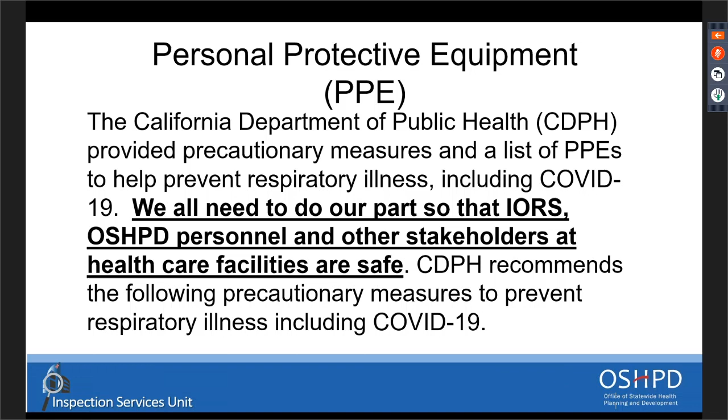Wash your hands with soap and water. Clean and disinfect frequently touched surfaces daily. If surfaces are dirty, clean them using detergent or soap and water prior to disinfection. Avoid touching your eyes, nose, or mouth with unwashed hands.

I think if anything, this is very, very important. All three bullet points here, just be cautious. And if you are in an area where you have to touch something, climb a ladder, or get on your hands and knees to get under some plumbing, don't touch your eyes, your nose, or your mouth before you wash your hands.

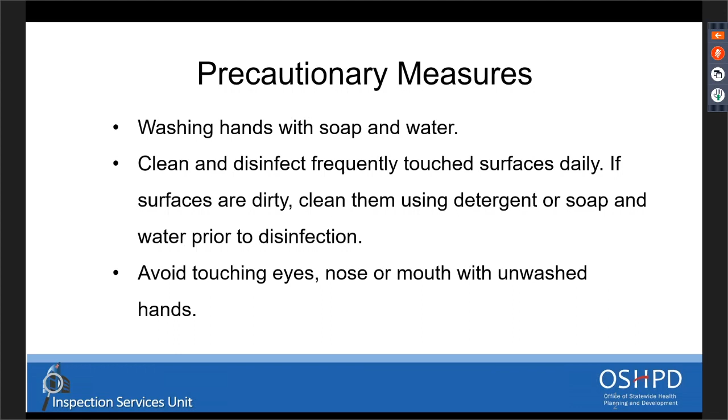Very, very important. Cover your cough or sneeze with a tissue or your elbow. Avoid close contact with people who are sick. Stay away from work, school, or other people if you become sick with symptoms like fever and cough.

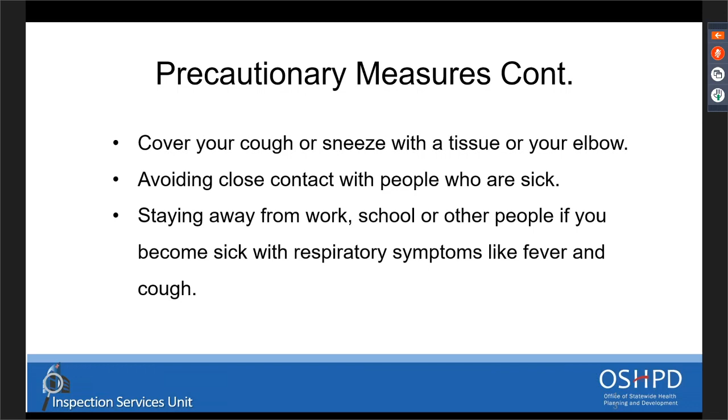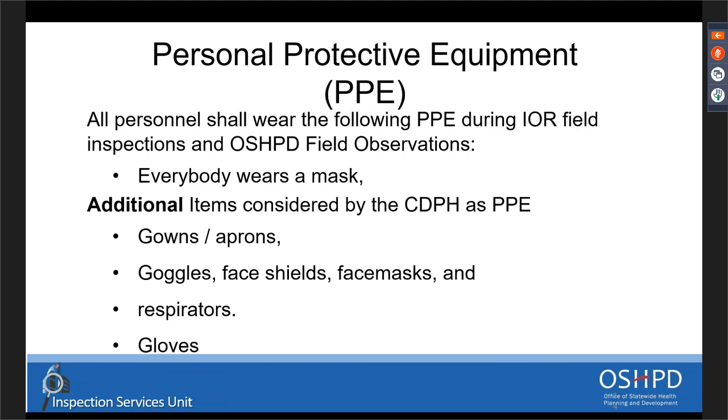PPE continued. All personnel shall wear a mask, is what we're telling people. Other additional items considered by the CDPH as optional are gowns, aprons, goggles, face shields, face masks, respirators, and gloves.

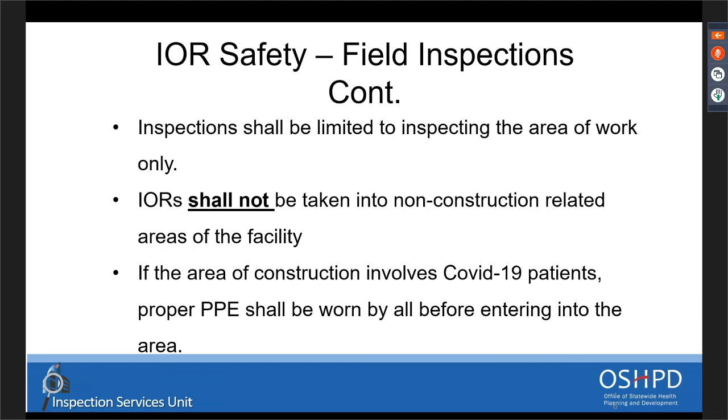Be sure to inspect only the areas of work. IOR should not be taken into construction areas that are not related to the work being done. And if the area of construction involves COVID-19 patients, proper PPE shall be worn by all before entering the area, so make sure that you protect yourselves.

If the area of inspection involves roof construction, the person responsible for guiding the IORs on the roof needs to identify all of the roof vents, where they are on the roof, and what area of the facility the vents are exhausting, like COVID-19 isolation rooms, ORs, ICUs, laundries, etc., making sure to steer the IORs and OSHPD staff away from those areas. You want to know where they are and how they're going to do that, so they need to provide you a roof plan of this information before you get on the roof.

That way, once you get on the roof, if you have a vent that's fairly close to the area you're inspecting, you need to be able to stay away from that area as well.

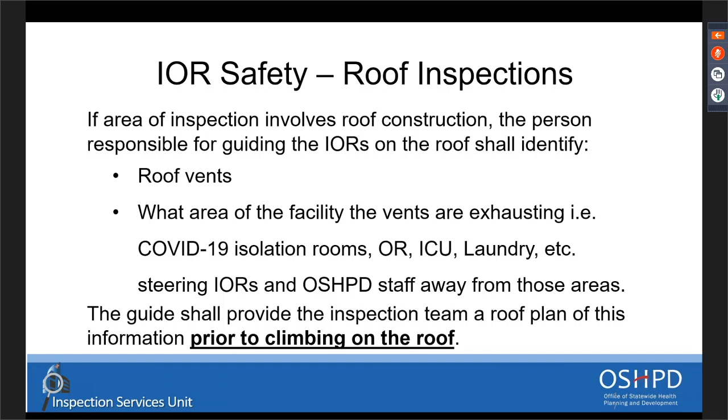A poll question: When guiding the inspection team through the facility, the guide shall be responsible for what? Avoiding non-construction related areas, avoiding all areas with COVID-19 patients, identifying all the roof vents exhausting COVID-19 areas, providing the inspection team a roof plan, or all of the above.

If you chose all of the above, you're right. All of these items are essential for your job as you're walking the job, and it doesn't have to be on the roof. If you're walking through an area where you may have to go through a room or an infected area, make sure you know that, and have that conversation with the construction manager or contractor as they guide you through the work.

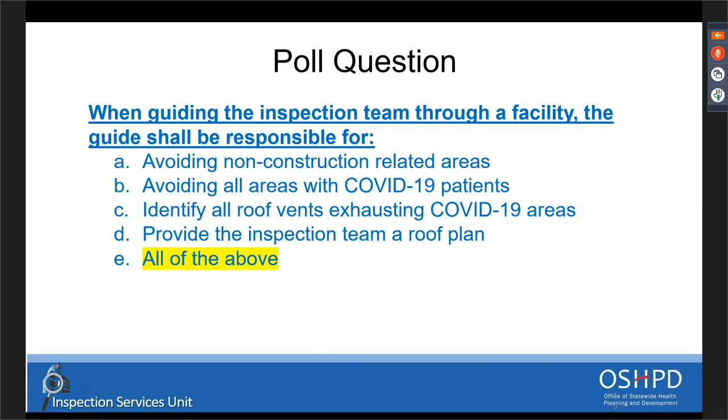So, what is a testing, inspection, and observation program, the TIO? This TIO program is crucial to OSHPD projects, and we're going to go over why in just a sec.

The TIO is a guide to assist the design professionals in the administration of construction projects under OSHPD's jurisdiction. It increases collaboration, accountability, and cooperation, provides assistance for the efficient development and implementation of code-required tests, clarifies the roles and responsibilities of the parties involved, and better defines the milestones in each project.

So this is a tool for the design professional to administer the actual project. Notice that we didn't say the TIO is administered by the IOR. If you've been part of our previous sessions, you'll know that the TIO program is not administered by the IOR—it's actually administered by the design professional, and that's a code requirement.

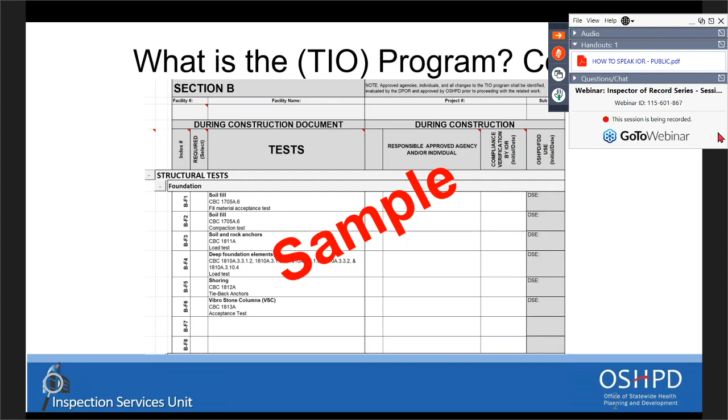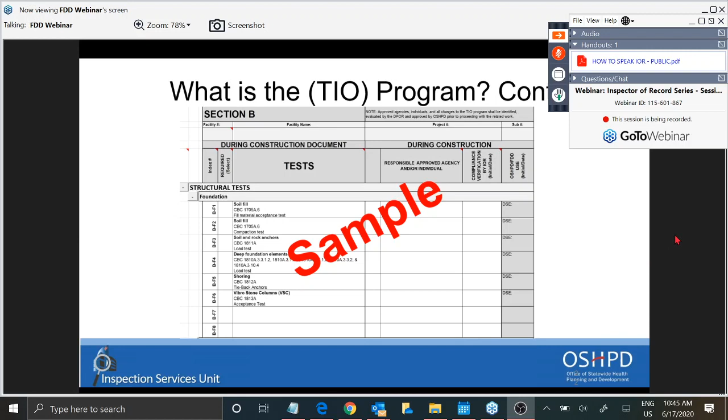On the right-hand side, in a vertical position, you'll see compliance verification by the IOR. That's where you as an IOR will come in and initial and date if you agree with their findings and if everything's okay per the required test. Then next to that box, you'll see OSHPD/FDD use, where we will go ahead and initial and date as well.

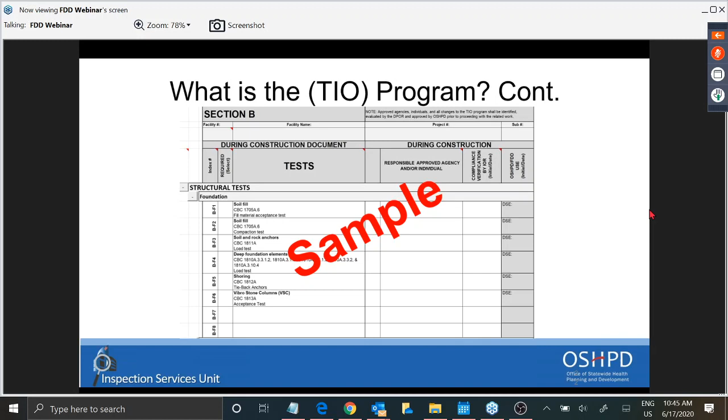What is a TIO program, continued? The TIO is a required element for OSHPD projects. Design professionals of record, or DPOR, must maintain all aspects of the TIO program current, since evolving projects—OSHPD projects—are rarely static.

So this is something you'll find the design professional will come in and have to identify the tests and samples required in the ever-changing construction project. If you've been part of any construction project, you'll find that rarely any project, regardless of size, is static—it's ever-changing. This leads into another area of the presentation where we emphasize that you, as an IOR, need to be active in the project. You need to be able to go out there and have conversations with the contractors and the people doing the installation about what's coming up and on the schedule.

So we'll get more into that in a little bit. OSHPD projects are dynamic and require team collaboration and regular reference to the TIO for milestones.

The format is the format we have on the website right now. It's an Excel format and it's downloadable. We have it both in Excel and PDF.

But know that this format we have on our website is just a sample, and it can be used by DPORs. But the DPOR can develop their own project and make it specific to their project. It may be that we didn't identify some of the tests required for that specific project, and again, the DPOR would have a better sense of that. So consult with your DPOR or the design professional as to what tests are going to be required and what samples are required as well.

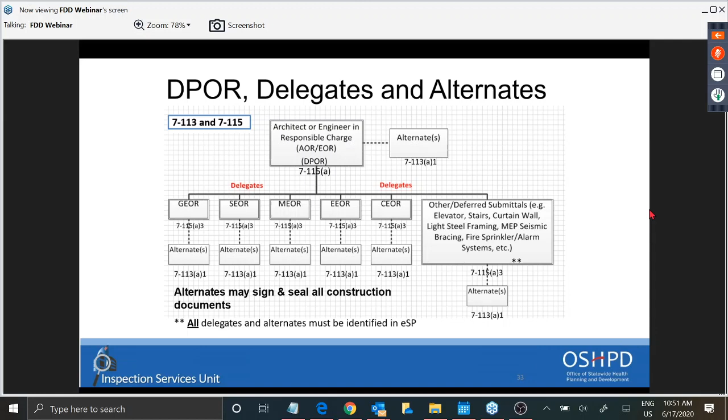The IOR is also responsible for gathering, maintaining, and validating related test and inspection documents such as credentials of special inspectors, and that's the code section that says you have to do that, collection of OSHPD test and special inspection forms, distribution of OSHPD staff field reports to contractor, owner, and DPOR.

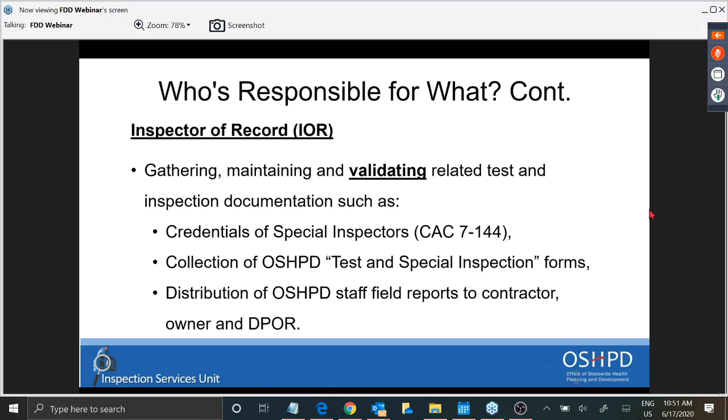You're also responsible for validating the work done by contractors, submitting VCRs to the DPOR as identified on the milestones on the TIO, keeping records relative to sign-offs, performing all IOR tests and inspections identified on the TIO as IOR responsibility.

The hospitals, per this section in the administrative code, California Administrative Code section 7-144, says the hospital shall provide for competent, adequate, and continuous inspection by one or more IORs.

When the hospital proposes more than one IOR, this is what needs to happen. On the TIO, a lead IOR needs to be identified to coordinate and communicate with the office. All other IORs also need to be approved by OSHPD prior to working on the project. On the TIO, the lead IOR will be identified, and all of the other IORs shall be identified as to what scope of the project they're going to be responsible for inspecting.

Poll question: who is responsible for the TIO? Is it the IOR, hospital owner, DPOR, or the contractor? And if you thought the DPOR, you're right. I think we stressed that a couple of times, so I'm hoping you got it.

IORs and inspections. So what's a competent inspection? It's reporting of all inconsistencies or seeming errors in the approved construction documents, preparing complete and accurate field reports for each day or portion of the day present at a job site, noting all construction deficiencies or deviations from the approved construction documents, making sure you note the date, time, and method of correction for the deficiencies, and notifying the contractor in writing of any deviations from the approved construction documents which have not been immediately corrected by the contractor. So this is key.

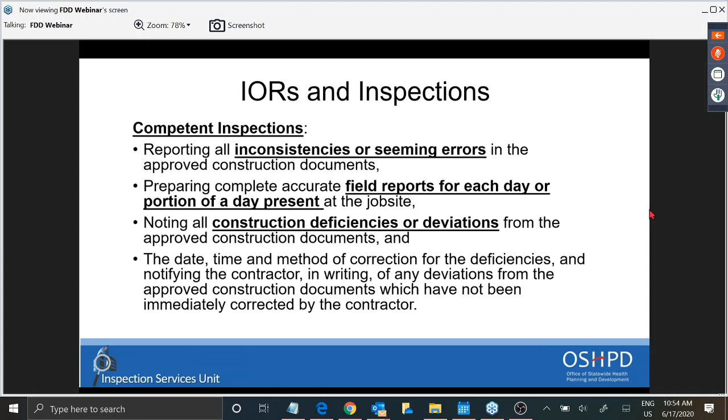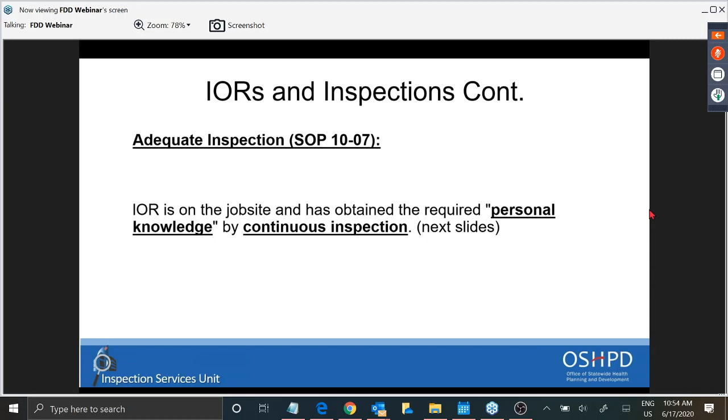Adequate inspection, what does that mean? SOP 10-07 is a document on our website, Standard Operating Procedures 10-07, and it clarifies what the adequate inspection is we're looking for. The IOR on the job site has to be on the job site and has obtained the required personal knowledge by continuous inspection. We'll go into continuous inspection on the next slides.

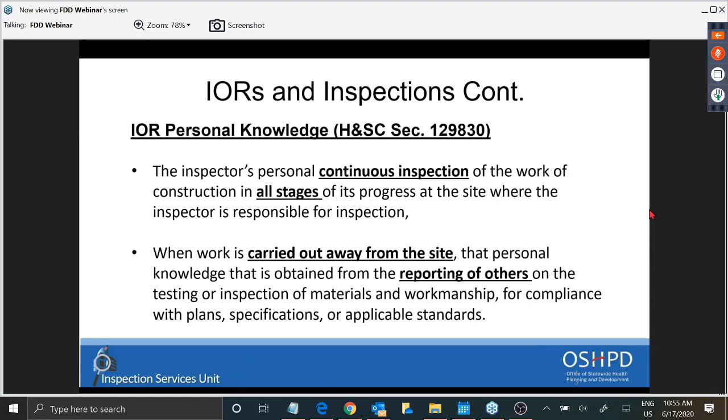IOR personal knowledge, H&SC means Health and Safety Code, section 129830. And this is what it says: the inspector's personal continuous inspection of the work of construction in all stages of its progress at the site where the inspector is responsible for inspection. It also means that when work is carried out away from the site, that personal knowledge is obtained from reporting of others on the testing of or inspection of materials and workmanship for compliance with plans, specifications, or applicable standards.

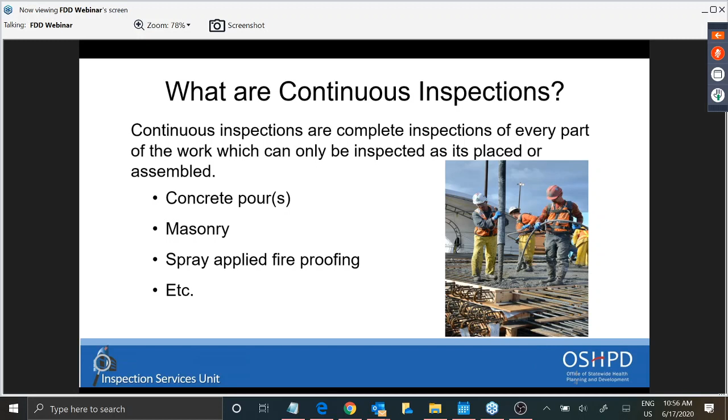An example of continuous inspections could be something like concrete pours, masonry, spray applied fireproofing, etc. Continuous inspection is inspection of the work that cannot be inspected after it's placed. So if you're needing to look at the placement of the concrete and the specs call for a concrete vibrator needing to be used, you need to be sure that it's there, being used, and it's the right size. If it's too big, it might blow out the framing for it, etc. So your presence and your inspection is needed continuously during these types of applications.

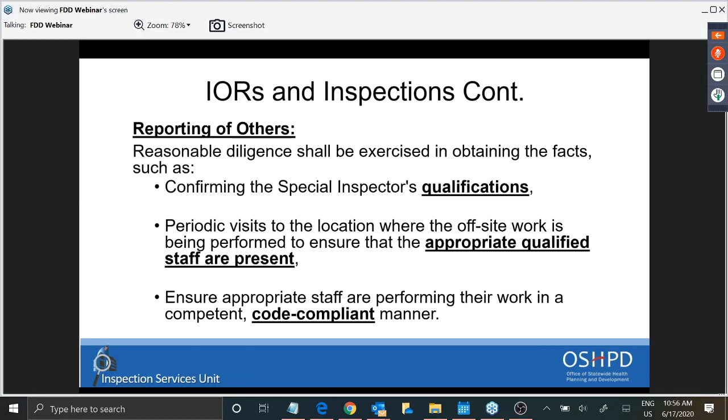IORs and inspections continued. The reporting of others - reasonable diligence shall be exercised in obtaining the facts, such as confirming the special inspector's qualifications, and we'll get more into that in the next slides. Periodic visits to the location where the off-site work is being performed to ensure that the appropriate qualified staff are present and performing their work in a competent, code-compliant manner.

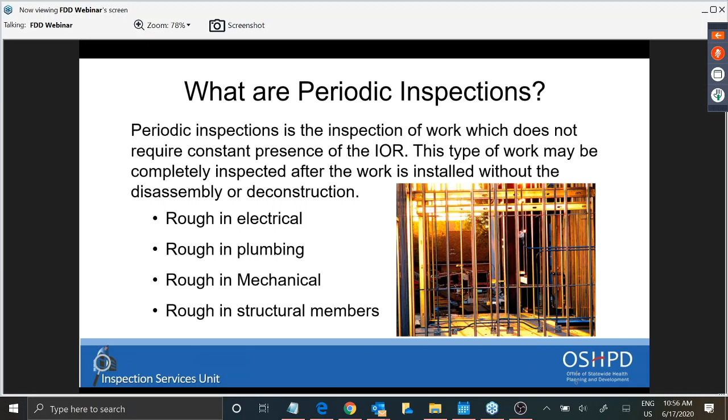So a periodic inspection is something that can be inspected after it's installed, such as rough frame. In a rough frame, you have rough electrical, rough plumbing, rough mechanical, and rough and structural members. You can inspect the majority of this stuff, I'd say 99%, before it's covered up, but after it's installed. So this would be an example of periodic inspections.

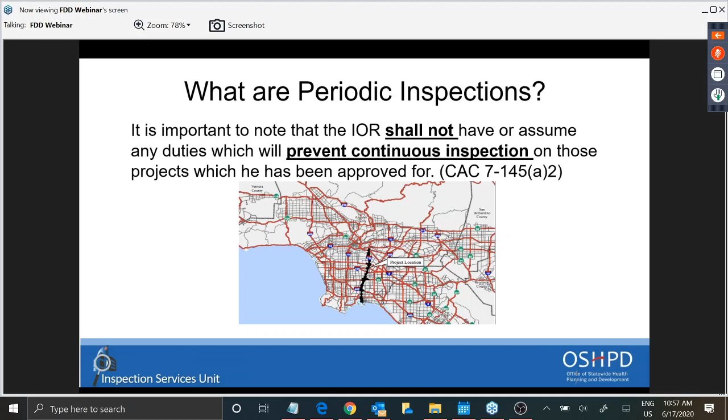So, poll question: should an IOR assume jobs even if it will prevent him or her from providing continuous inspection? Options are yes; yes if approved by the design professional of record; yes if jobs are close to each other; or no. The answer is no.

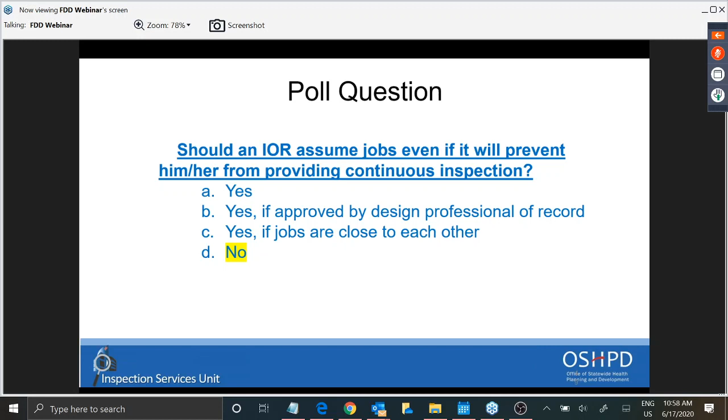So if you can't do the job, it's probably best you don't take it on, because we'll get into OSHPD and IORs and what OSHPD will expect of you, more than we already have.

So, observation by OSHPD - what do we do? During the construction of any health facility, OSHPD shall make such observations as in its judgment are necessary or proper for enforcement of the regulations and applicable parts of the California Building Standards Code, usually referred to as Title 24, including all of its parts.

This includes scheduled and non-scheduled visits by OSHPD. Just because we don't give you a heads up that we're going to stop by doesn't mean we won't - we can stop by if it's on our way to another job and ask you to provide documentation as the code allows us. We're hoping that you're there doing continuous inspections as needed.

Best practice: communicate and establish with FDD, OSHPD field staff, their intended observation plan, milestones, and IOR inspection expectations. Communication is key - use OSHPD as a resource, come in and say, 'this is what we have going on this project, what are you going to want to see from me?' That's a great opportunity to discuss the project at length and better understand what we're looking for.

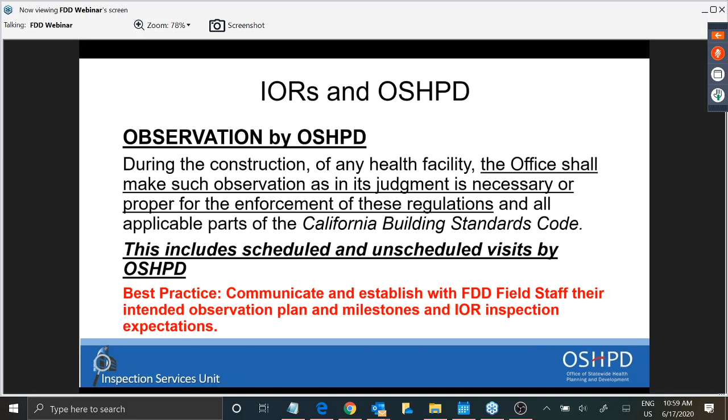OSHPD field visits - what's that going to include, and what should you do as an IOR? The IOR needs to prepare documentation for various inspections to ensure they were adequately and competently conducted. Records need to be up to date with codes, plans, specifications, and approved changes.

You need an up-to-date TIO, outstanding RFIs waiting on direction from the DPOR, and need to show OSHPD how inspections and results have been organized, and be able to discuss the project process. Also be able to identify any problems being faced in the field, discuss IOR and DPOR communication frequency of meetings, and provide OSHPD a tour of the facility to outline progress and concerns.

This is a point I want to stress: be able to go out, time permitting, and walk the job site with the OSHPD field rep, identifying the sections you're concerned with. This is a great opportunity to further enhance communication with OSHPD - discuss what code section applies, what your concern is and why. It may also be a chance to discuss some of your outstanding items list.

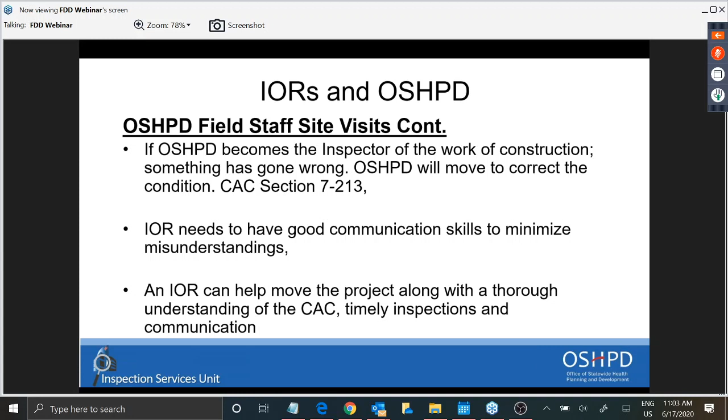Poll question: what is one of the main factors for an IOR's success? Communication, up-to-date plans, organization of files and plans, or all of the above?

I hope this is common sense, but we're here to point it out. Communication and up-to-date plans are great, and that's something you'll face on the job site, ever changing. Remember, projects are typically not static and always changing, so make sure you have up-to-date plans with a stamp of approval, and make sure you're inspecting to an approved set of construction documents.

Very often, because the project is non-static, you'll have RFIs coming out and people saying this is how we want you to build it. You have to make sure the detail or updated plan has the right delta on it, and that it's been reviewed and approved by OSHPD prior to inspecting to it. So if you see a set of plans or a detail that's not approved, pause and ask the question: has it been approved by OSHPD?

IOR daily reports and field records. Per the California Administrative Code, IORs need to provide a daily report while on the job. The report shall include time of arrival and departure, summary of work in progress, deficiencies in construction, deviations from approved construction documents, and the date, time, and method of correction for deficiencies and deviations.

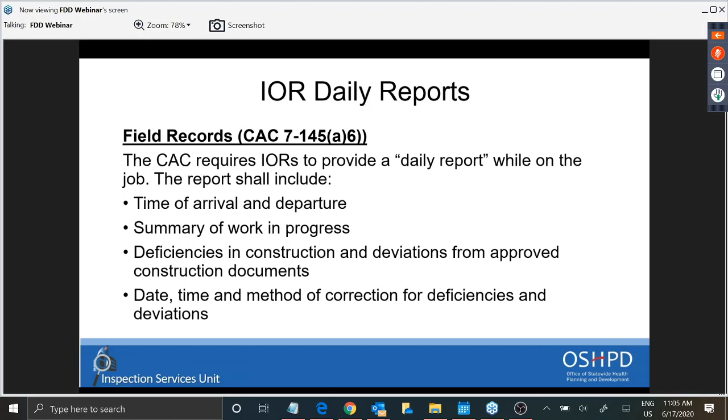I also want to add that I've seen reports that include the temperature outside and the kind of weather the day had. It's important because if you ever need to look back on your report to understand why the concrete didn't cure right, or why the intumescent paint on a structural member didn't do its job, you want to be able to say it was too cold that day, and that you told them they shouldn't have applied it because it was colder than allowed by the specifications for the material. It becomes a record of your actions in the field, and it helps you down the line.

So the IOR shall maintain field records on site, including daily reports, all test and special inspection reports, a list of test reports for non-conforming materials or defective workmanship with the method of correction indicated, approved construction documents like complete plans, specifications, addendas, deferred submittals, and change orders, plus the TIO program and building permit.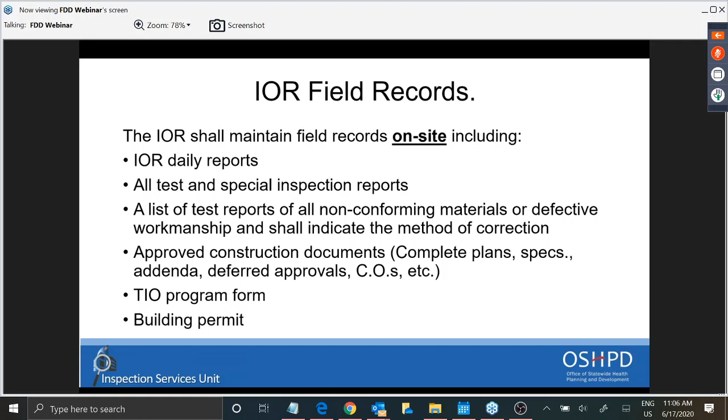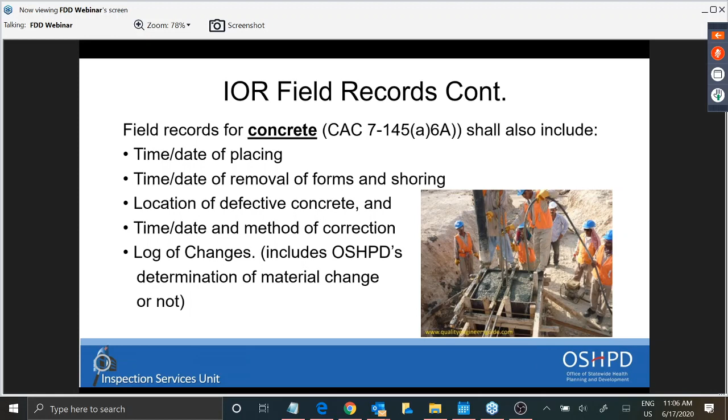Field records continued. For concrete, in addition to the daily report, you need to identify the time and date of placing, time and date of removal of forms and shoring, location of defective concrete, time and date and method of correction if there was an issue, and a log of changes, including all OSHPD determinations of whether a material changed or not. For welding, the code wants the ID marks of welders, list of defective welds, manner of correction of defects, and other related events identified in your daily report.

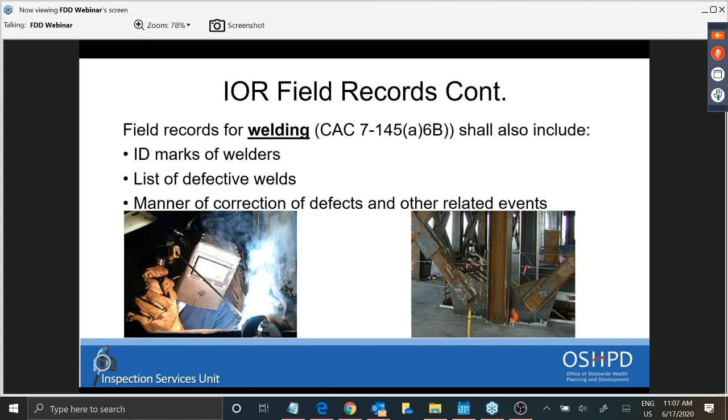For pile-driven foundations, the administrative code also wants location identified, i.e. grid lines and proximity to. I'll pause here to suggest that it's also a great idea in your daily report, whether you're inspecting plumbing, electrical, structural, fire sprinkler alarms, or whatever on a large or small project, to identify where on the project you did your inspection, using grid lines in your daily report.

For example, if you're going out doing an inspection of rough plumbing on a project and it's on the second floor, on your daily report, identify what sheet, what grid line, whether it's J12 in room number 125, to better help identify what section of the project you inspected. That suggestion is great for any inspection you do out in the field.

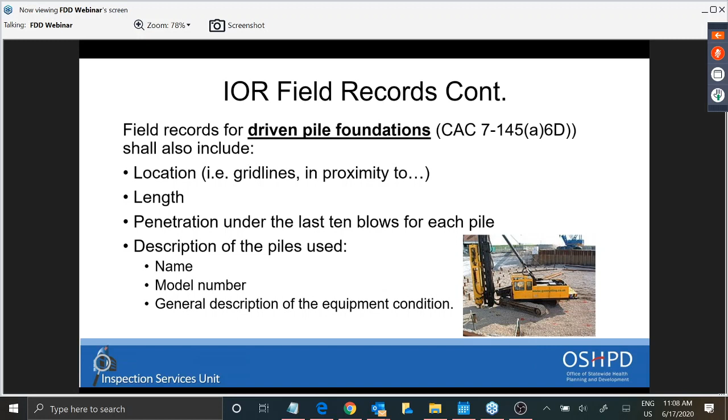Coming back to driven pile foundations, identify the length, penetration under the last 10 blows for each pile, and description of the piles used, the name, the model number, and also include the description of the equipment condition being used.

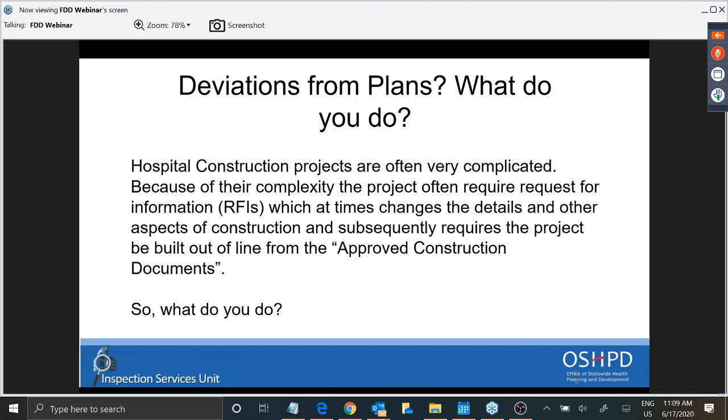Construction deviations. So what happens if you see something that doesn't look right? Hospital construction projects are often very complicated. Because of their complexity, the project often requires requests for information, RFIs, which at times change the details and other aspects of construction and subsequently require the project to be built out of line from the approved construction document. So what do you do?

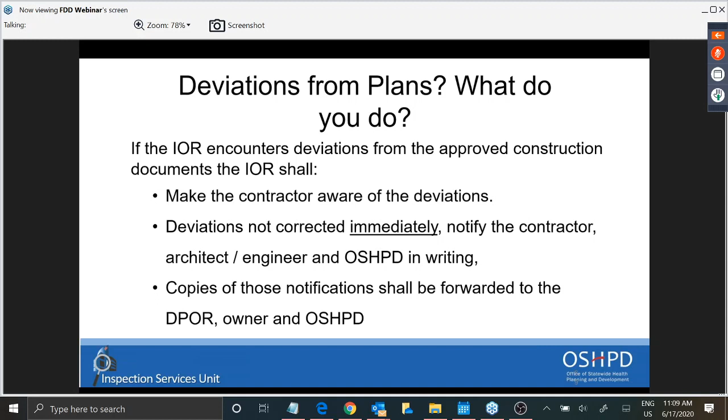If the IOR encounters deviations from the approved construction documents, you need to make sure the contractor is aware of the deviations, like we mentioned before. If the deviations are not corrected immediately, notify the contractor, architect, engineer, and OSHPD in writing. Copies of those notifications need to be forwarded to the DPOR, owner, and OSHPD.

Is the IOR required to notify the owner and OSHPD in writing of all construction deviations? Yes, no, only if it's not corrected immediately by the contractor, or no vote. Only if it's not corrected immediately by the contractor, and that's important.

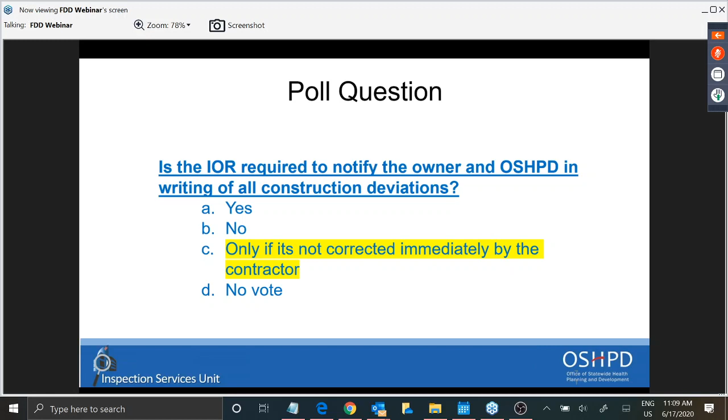Notices to OSHPD. What do you need to send into OSHPD? As an IOR, you need to have copies of the deviations from the approved construction document notices when the work has started or resumed on the project, and at least 48 hours in advance of the time when the foundation trenches will be complete, ready for footing or forms, at least 48 hours in advance of the first placing of concrete, and when work has been suspended for a period of more than 2 weeks. So these are all reasons to send OSHPD notices.

This is going to happen when you are out on the job and having conversations with the contractors, going to construction meetings, and keeping up to date on the job. One thing we wanted to point out is, as an IOR, it's not your job to sit in a construction trailer and wait for an inspection request. You actually need to go out there and be active in the project. You need to have those conversations and that line of communication with everybody involved on the job.

Because that's going to give you a keen understanding of the project, not only of what's up and coming as far as work to be done, but also typical issues that you're finding out on the job. Walking and talking with the people doing the work, you'll find that so-and-so is having issues installing an electrical conduit because they ran into a plumbing line. So what are we going to do there? Keeping up on the project and stuff like that is always helpful.

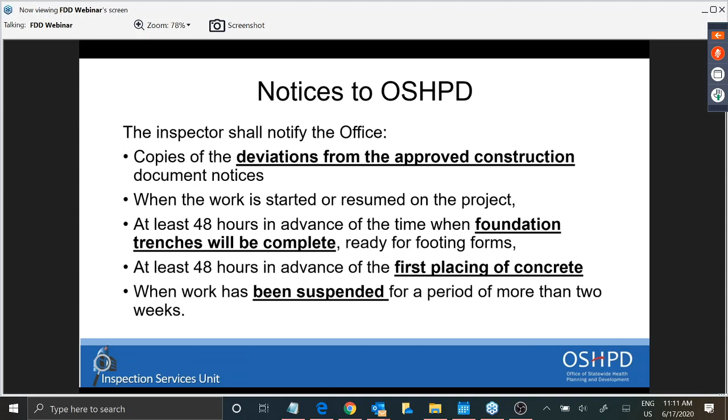The California Energy Commission forms, or the CEC forms, this is something new to OSHPD that's been introduced in the California Administrative Code. We'll briefly go over what it means for the IOR. Before we get there, we'll go ahead and identify what they are.

The forms identified on the TIO by the DPOR are required to be completed under the purview of the installing contractor when it comes to the CEC documents. The document is going to say, identify what was installed to meet the CEC non-residential compliance forms. Just as an FYI, as we see the next slides, the field technician is the installing contractor. Licensed installing contractor equals a responsible person.

Under penalty of perjury, they are coming in and saying what's installed is approved per the approved construction documents, to the best of their knowledge. So what's your responsibility as an IOR?